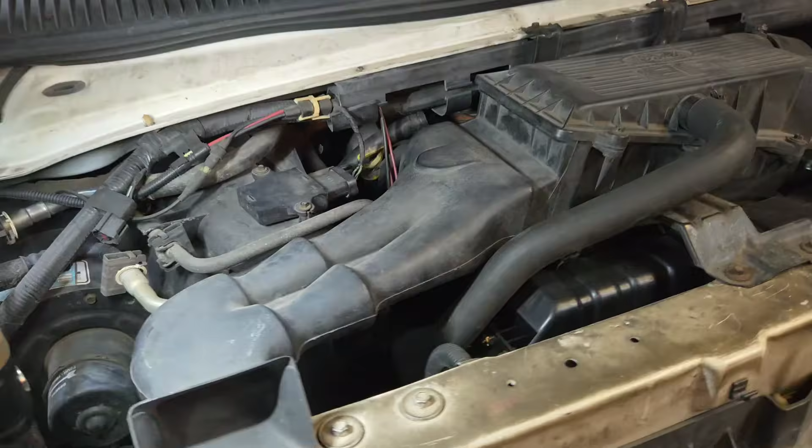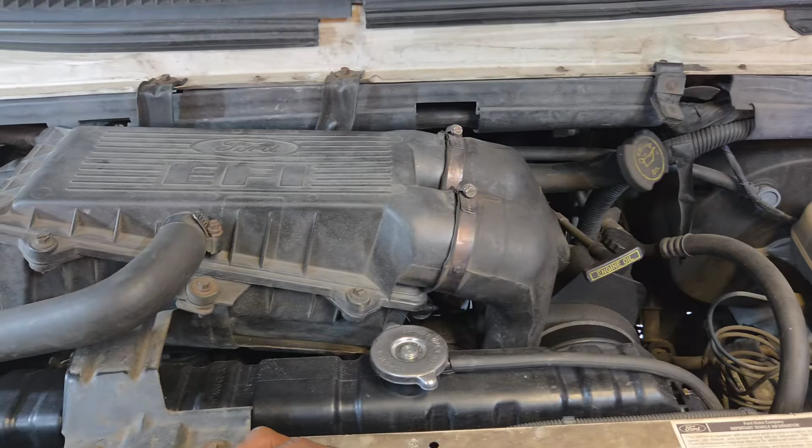Got a 19, I'm about to say 2000. So accustomed to saying 2000. 1999 Ford Econoline. It's a 4.9 engine, inline six, and just popped up. He called this morning. It's a commercial vehicle, and it was idling poorly, not running well.

I'm gonna let you hear it and let you know my thoughts, because what it is, you start it up, it just don't want to stay running, stay idle, and you have to hold the throttle to keep it running. But when you drive it, it drives. It's just when it's stationary, it just don't want to idle.

And it sounds like it got a camshaft, like a performance cam, so it's loping. And when he was talking over the phone about that, I'm like, map sensor. So if you dealt with a lot of older vehicles, if you disconnect the map sensor, it runs rich, because this is a very integral component on a lot of these engines, the older engines and even modern engines, because it needs to know the manifold absolute pressure (MAP) to determine the appropriate amount of fuel to deliver.

So you may have a mass airflow sensor pre-throttle body that can also still calculate how much fuel delivery is required. But in this particular case, it's a map sensor, and it takes the vacuum from the plenum in the intake post throttle plate. And with that information, it is very integral.

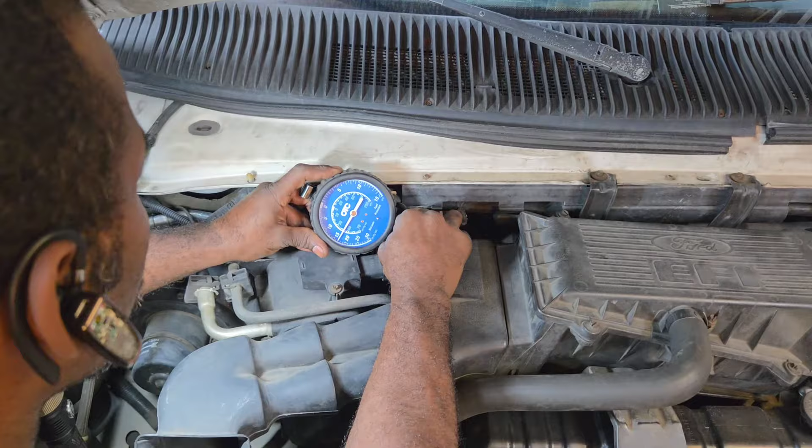So it'll clear up and start to idle fine. Let me check the vacuum. So with these map sensors, you want to make sure you have adequate vacuum. Around 15 inches is normal. Between 15 and 20, that's really good. 20 is really good. But so we're around 16 right now.

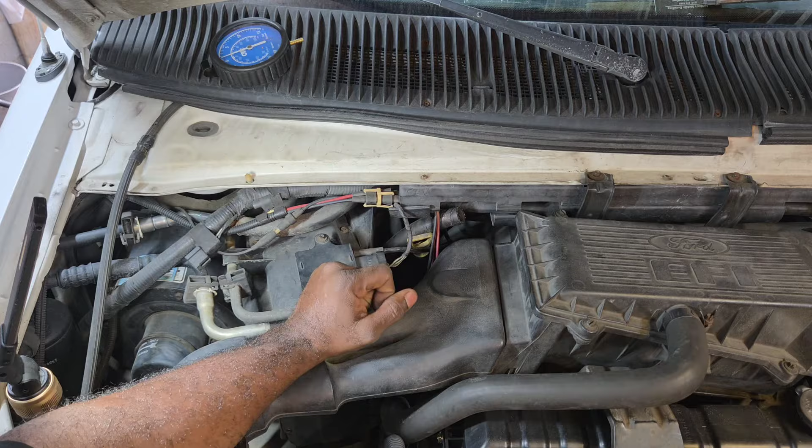Plug it back in. And then it wants to stall. Let's check the powers and grounds, because we need powers and grounds and signal. Being this is the old style, it measures hertz. It doesn't go off of a dynamic voltage system, but more of a pulse system, a frequency. So, and I ain't the smartest, but I do have a device to tell me the value that it is producing, which is the Power Probe 4.

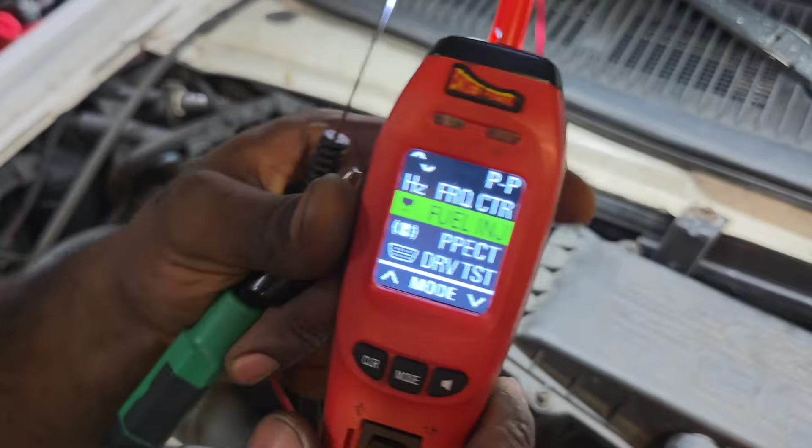So let's get this disconnected. We'll check our powers, grounds, and our signal. Usually the signal wire is going to be in the middle. And let's see where we're at. We got the Power Probe 4. It has various test capabilities on here. Multiple different tests.

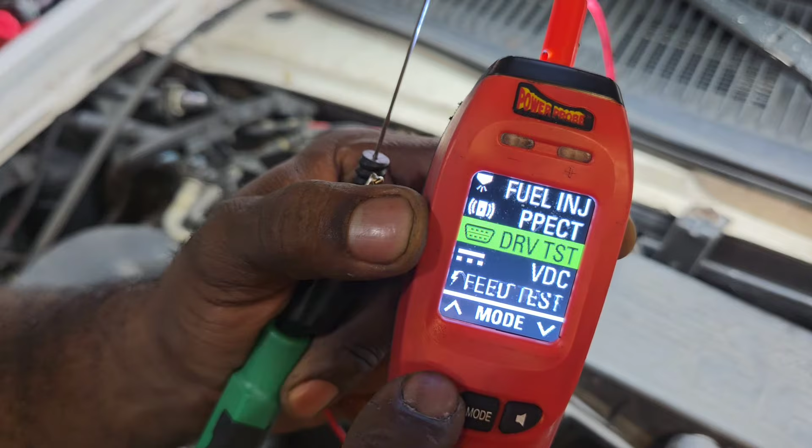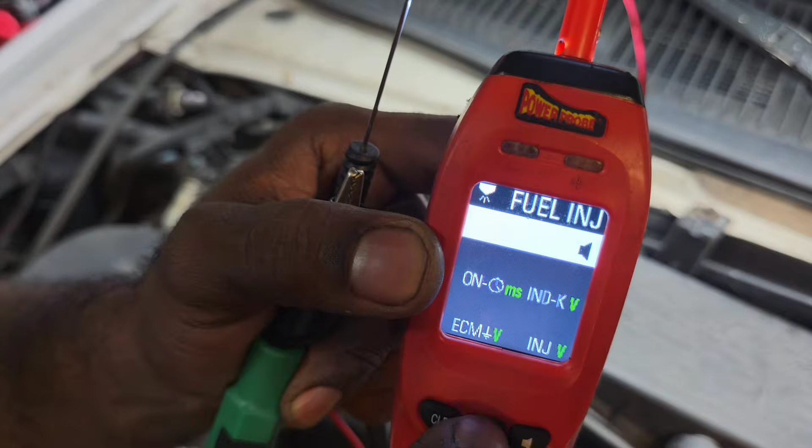We can measure alternating current. There's other pinpoint type tests, voltage feed tests. We can do driver tests, and mostly it measures powers and ground. But the cool thing is it can measure injector on time too, in milliseconds. So we can measure that if we need to. But mainly we just need to test for powers and grounds and hertz.

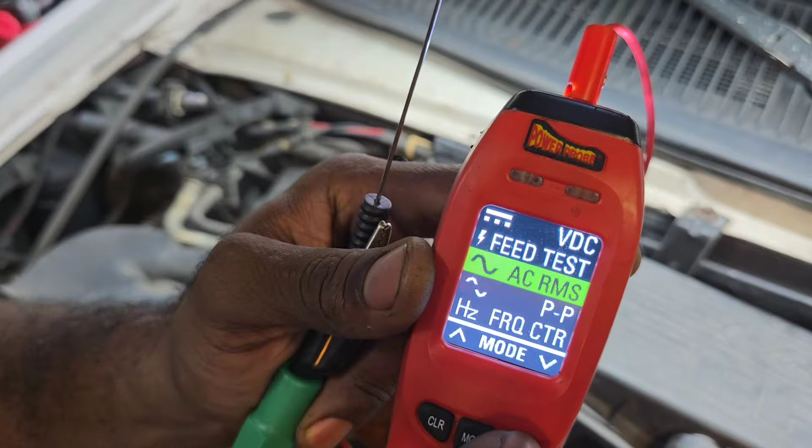So let's go to power feed test, VDC, voltage. Where is it? There we go, right there. So we're gonna go here, and we're gonna test for powers and grounds. Test my connection first. Make sure everything works. Let's get this pulled out. I do have the key in the on position. So key on, engine off.

That's what this test is going to consist of, and then we'll pull up a little bit of information and see what the standard is. But mainly we just need to tag on to the signal wire. So we need to know where our power and our ground is. So key is in the on position. Hopefully you can see this.

Voltage tip. Let me see if we can zoom in on that. If not, then I'll let you know what I'm seeing. I'll try to narrate. So we got 3 wires. Typically, one's gonna be voltage, ground, and signal's typically gonna be in the middle. Key is in the on position. And right here we got 5 volts.

On the other end we have ground. So here's our ground on the far left, this is like a white with a red stripe. Then we have a brown and white stripe, which is going to be our 5 volts. So the signal is going to logically be in the center, and there's our signal right there in the center.

How I know it's going to be a signal is typically because of the voltage being lower. It's lower than the supply voltage because it's going through like a driver and various resistors or some stuff like that. However it decides to interpret the information, it's going through other components inside the computer. If I'm in doubt of which one is the voltage supply, I can use a test light and watch it dimly be lit. Let me show you.

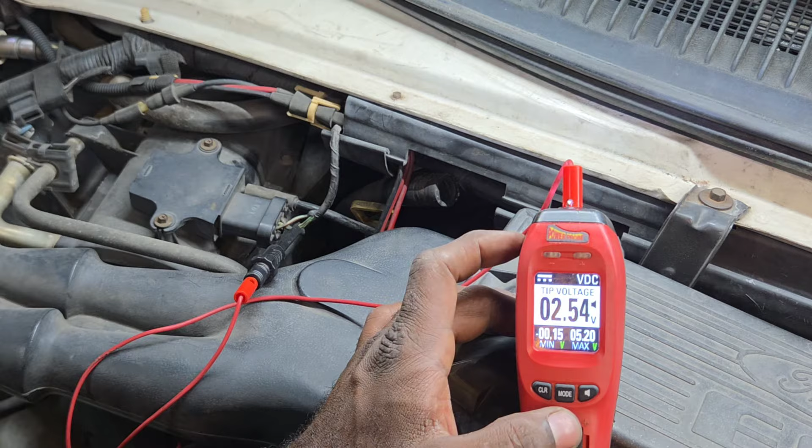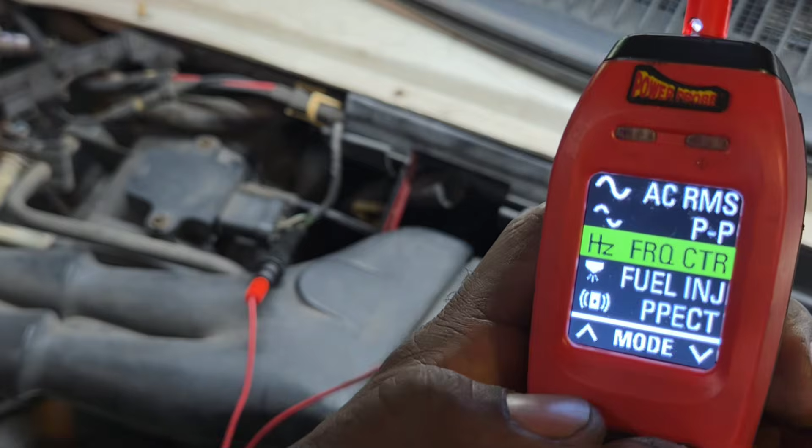Let's go to the portion to read the frequency. There we go. Okay. Current state with everything off is 135 hertz. Let's pull some factory data.

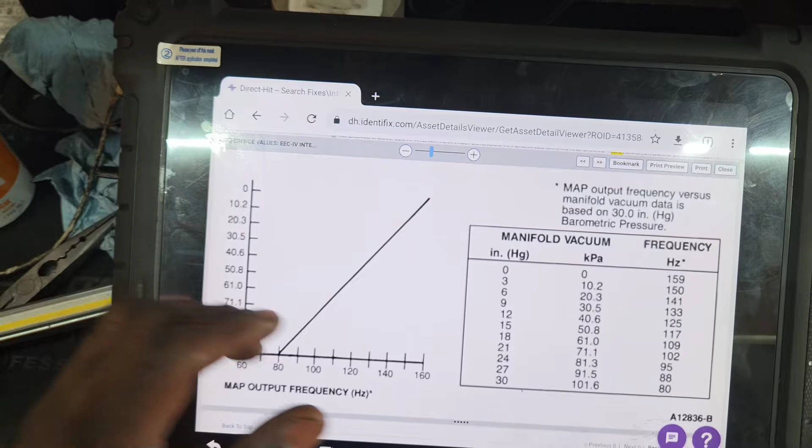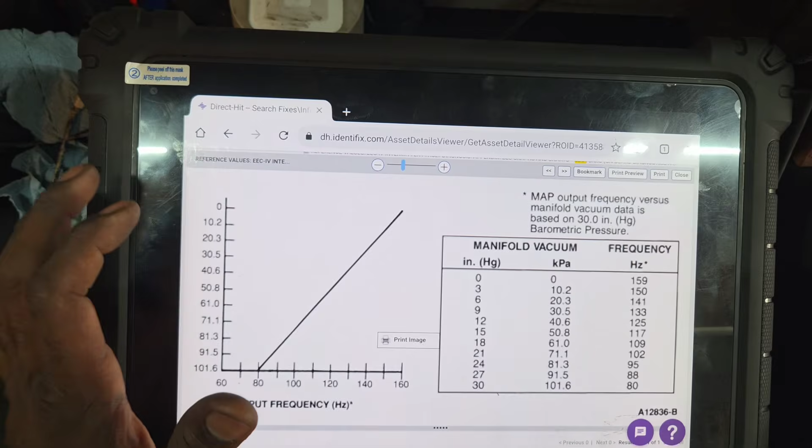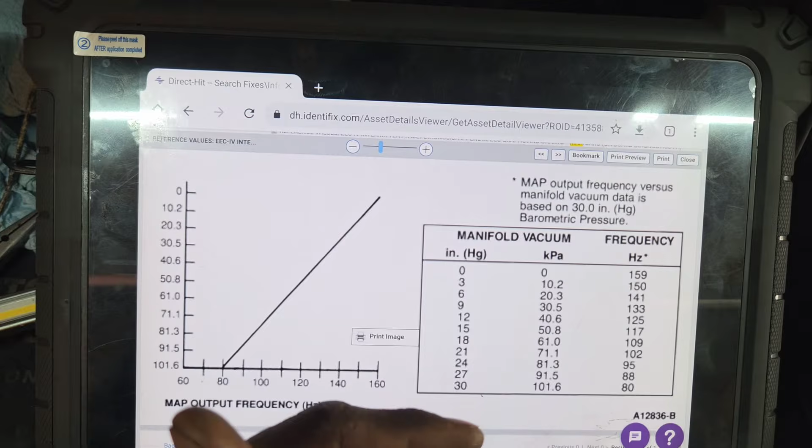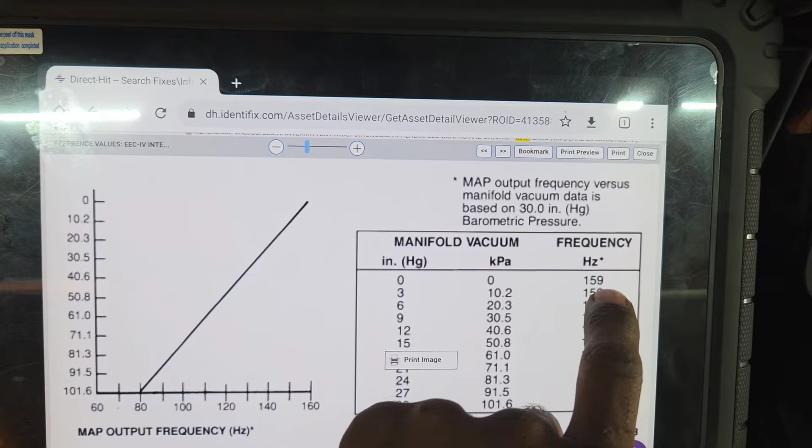So here, since we're on Identifix, we have service information, the standards of our component, where it needs to be. So the inches of mercury here, right here, 0. We need to be at 159 hertz. And let's see what the other one was reading. We're already off at 135 hertz. So we're already off there.

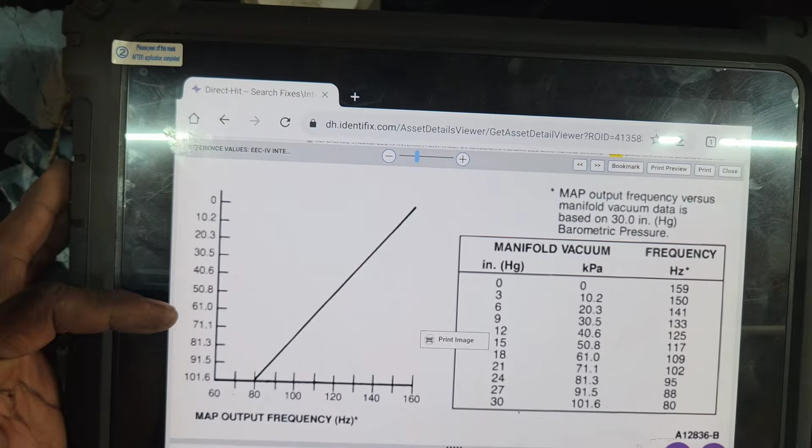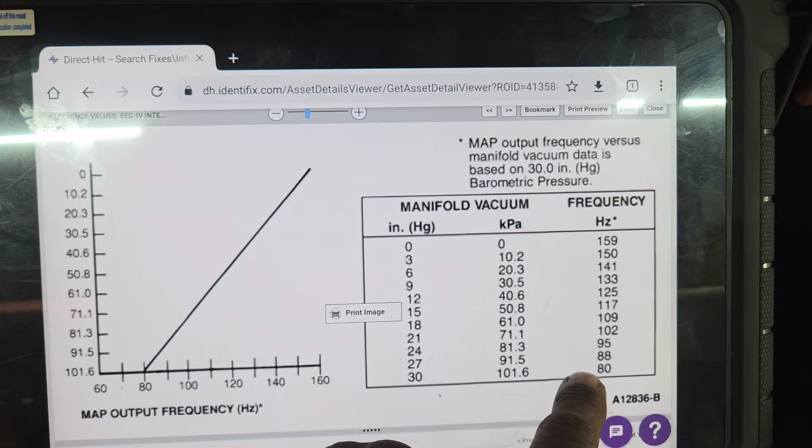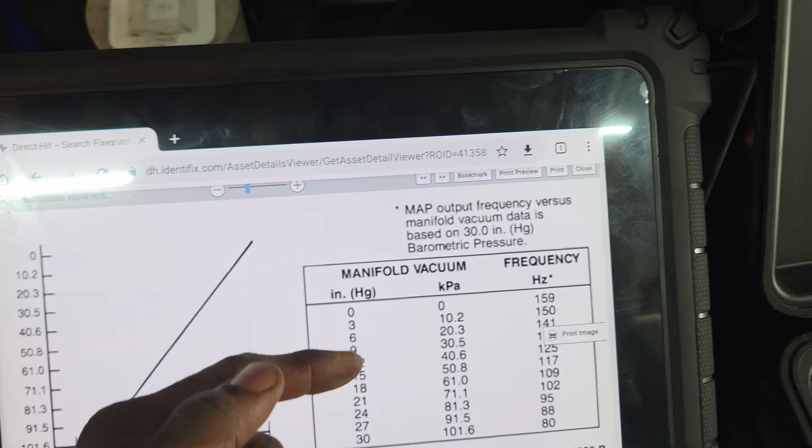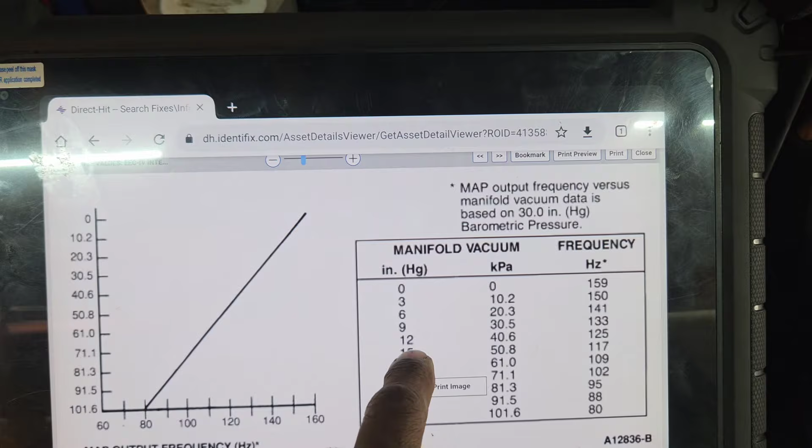So the deeper the vacuum, the lower our value. So this is the inverse of the voltage. I'm sorry, the inverse of our frequency here. So at 0, we need to be at 159. And the deeper we go into vacuum, which we were making around 16 inches of mercury, that should have been about 117.

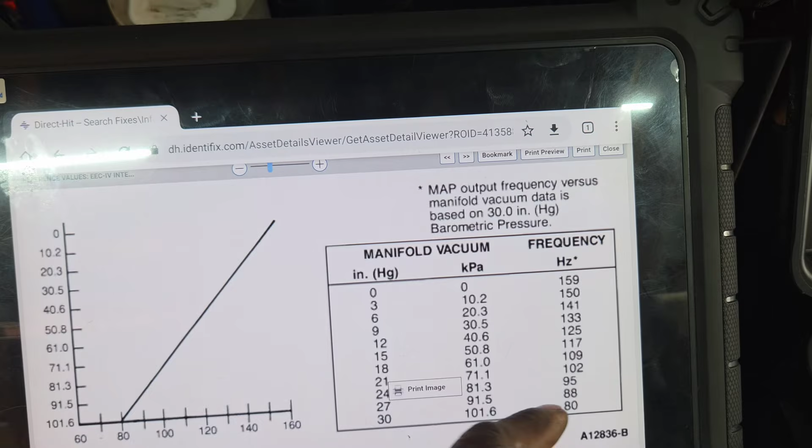So we crank this vehicle up, we need to be between 117 and 109, somewhere around about that. Let's just say 110, or 112 or so. I think that's a happy medium. So let's start up and see where we're at. All right, so again, we need to be at around about 112. I'm gonna take this vacuum line off so we can get it to idle. Then I'll plug it back in and see where it drops to.

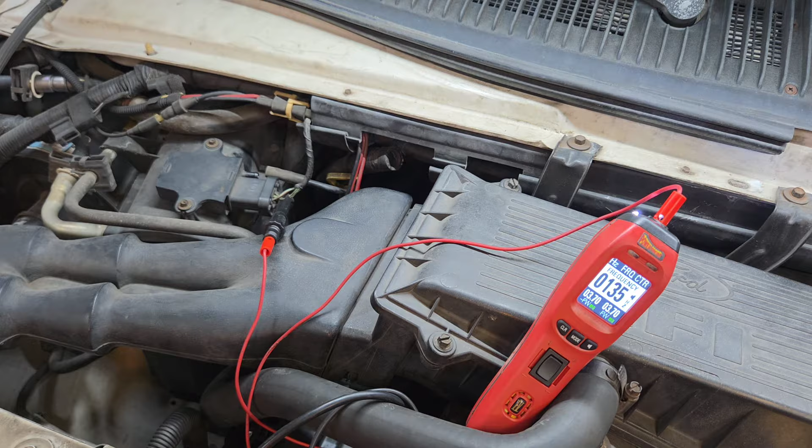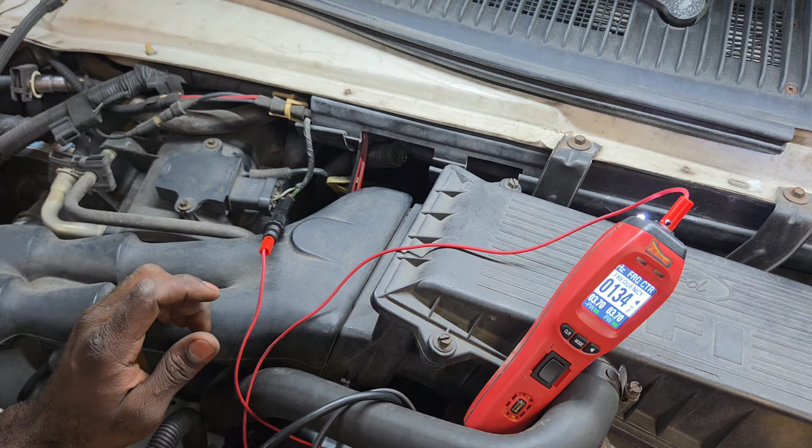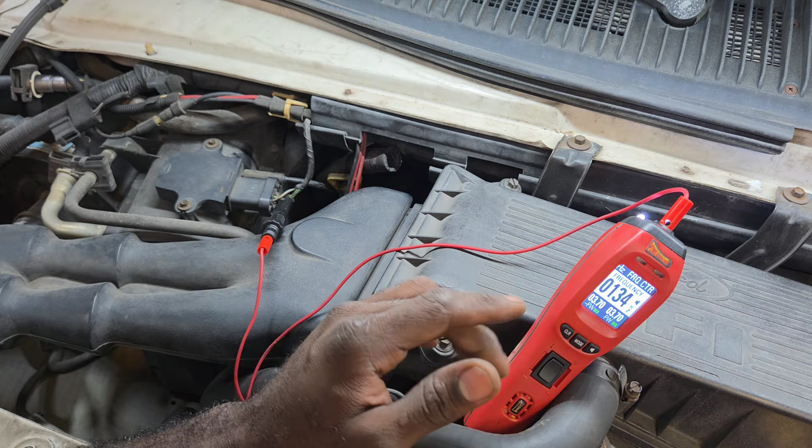I'm gonna plug it in now. Okay, we dropped down to 90. That's what we got down to. That don't seem right, because when I checked the vacuum, we dropped down to a maximum of 16, and 16 should have been around 112, not 90. Let me start it up.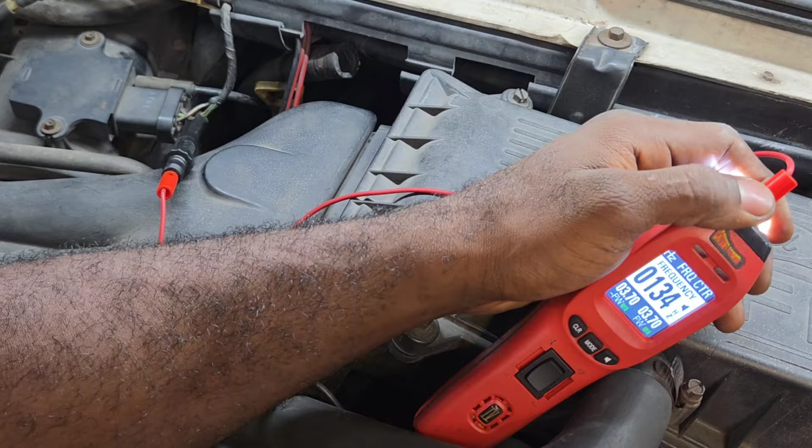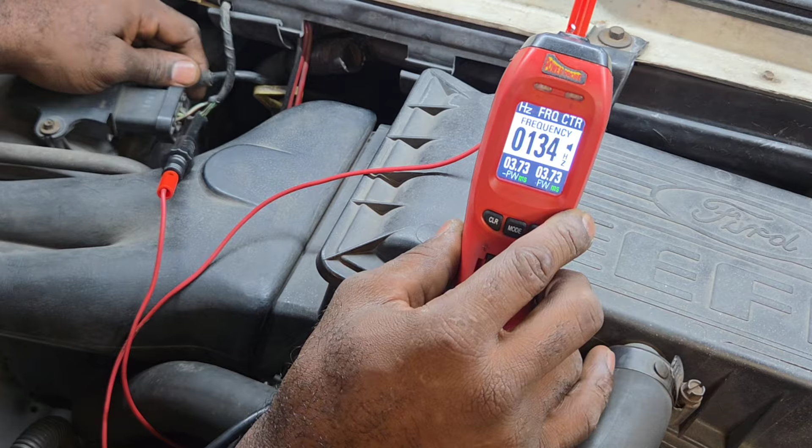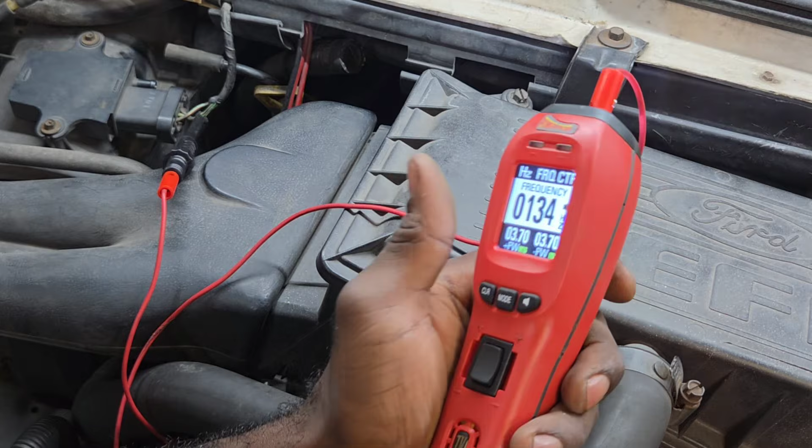Call me crazy, but there's no reason for it to go that deep. Let me try and see if I can keep it stable. Just dropping to 90. I feel justified in replacing this simply because the static state is off. And when we plug the vacuum source in, where we need to be is significantly off from that. So I think it's worth just going to the parts store, getting one and shooting a part at it. I think we might get lucky on this one.

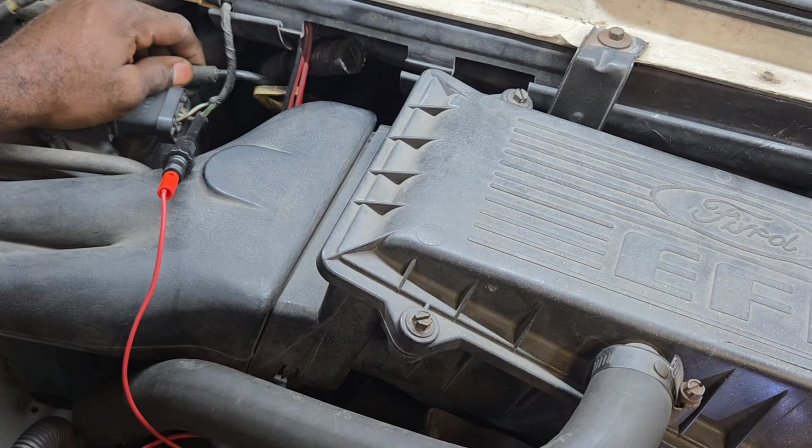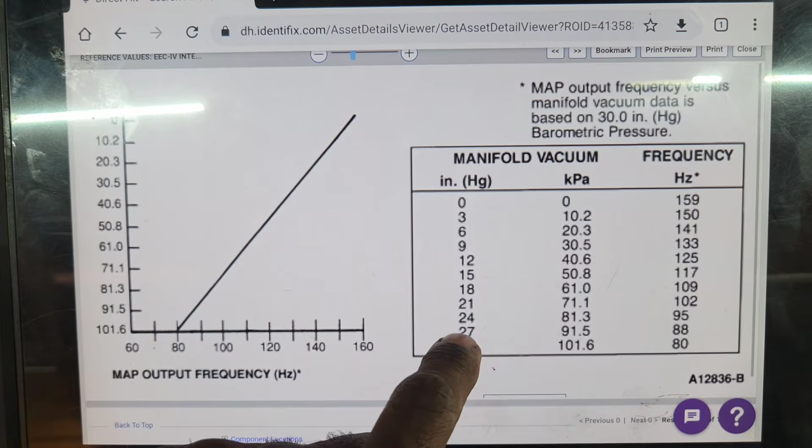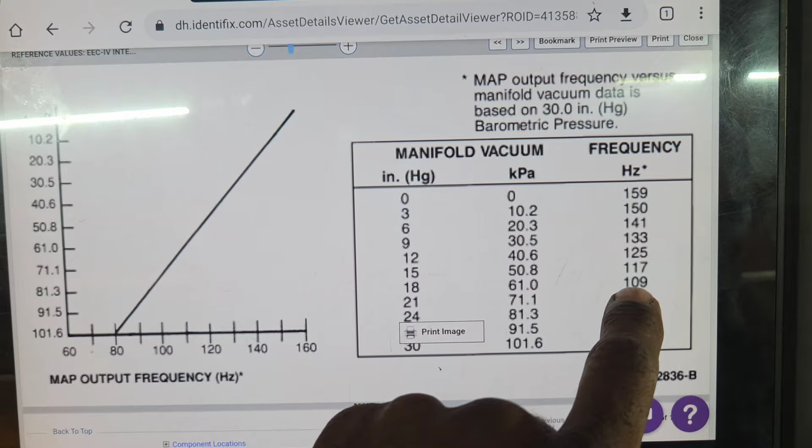So just to look at the graph again, 90 is crazy vacuum right there. The average car makes 15 to 20, and this is making somewhere around 25 inches of mercury. This is like unreal. So like I said, most cars are going to be around 15 to 20, so the most we should be dropping down to is 109, and we're not. We're going way below that. Let's go get a MAP sensor.

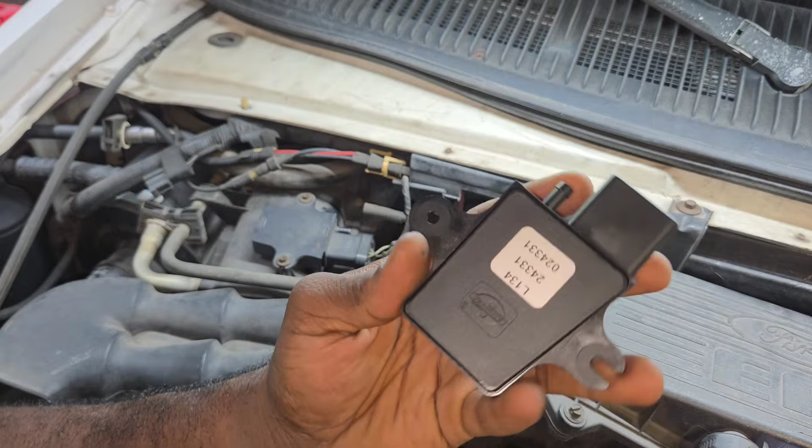Just got back from the parts store. Y'all know I frequently patronize O'Reilly's Auto Parts. Here's the part number, AS1. Standard Motor Products. This is what it looks like. It's actually got Standard stamped on it. It looks like a MAP sensor.

Sits right there. Now, what makes me a little nervous is we don't have a check engine light code. Maybe I just got conditioned into seeing check engine light codes and circuit faults, circuit mismatch, imbalance, out of spec, whatever, and we don't have that now. Okay, we can see that there's some unsatisfied conditions. Besides the data, I guess it's bittersweet that this is a rudimentary system, but I don't know. I'm nervous now. Let's get this off of there.

Get the comparative information when we plug it in. I mean, I'm doubting myself. Have what we had.

Oh, the key's not in the on position. Ha! Alright, where are we at? What have we fixed? This is not the right one. Now I have to be left in suspense again. Where's the voltage? It's different. Oh yeah, that's normal. I feel good now.

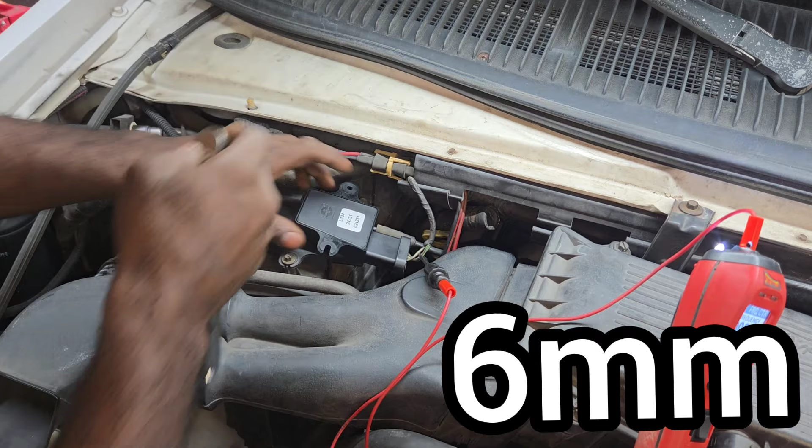Let me get these 2 bolts off. It looks like it's a 6mm or some very small head here. Let's get this off and replace it, and the new one popped in. Yeah, I got all worked up for nothing. But you know, at least you could see what the car was unsatisfied with. I mean, I'm overthinking it. Here's the old one, Ford OEM.

I mean, who rightfully wouldn't get nervous after just throwing the part on there that they know they need? I've been so confident in certain replacements and threw the part on there, and been just as wrong as I could ever be. That's that. I do want to put a little bit of dielectric grease on this nipple, so we wouldn't have any issues. It slid on extremely easy.

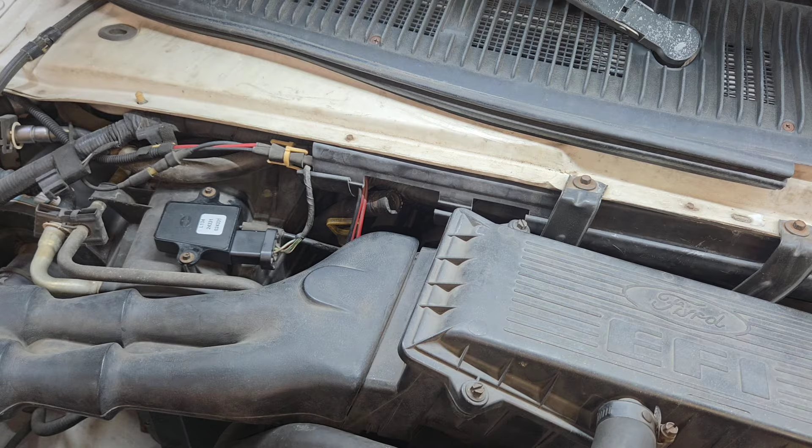Should we look at the data again? Got a phone call come in. All right, let's start up and see where we're at now. All right, we're still at our value, and it runs extremely smooth too. Before it was trying to stall. Now it runs amazing. Just snap the throttle. Well, this repair worked out pretty well.

Now, when I get these vehicles and they have specific symptoms, it could have been an oxygen sensor on this particular car. It could have been high pressure. It could have been fuel injectors. But there was the big key thing that was pointing to this MAP sensor. Just like a common cold can have a blended symptom with some sort of underlying disease, this had similar symptoms with other potential causes, such as fuel injectors, high fuel pressure, that is.

I mean, coolant temp sensor, but this specific component, just from experience, will cause idle issues, but it will clear up when you give it gas due to the compensation and the influence of the MAP with the computer. The most it's going to produce is when you disconnect it, when you full throttle and it can accept that. It was running a little rich, or probably in this case, because it was dropped so low, it was running lean.

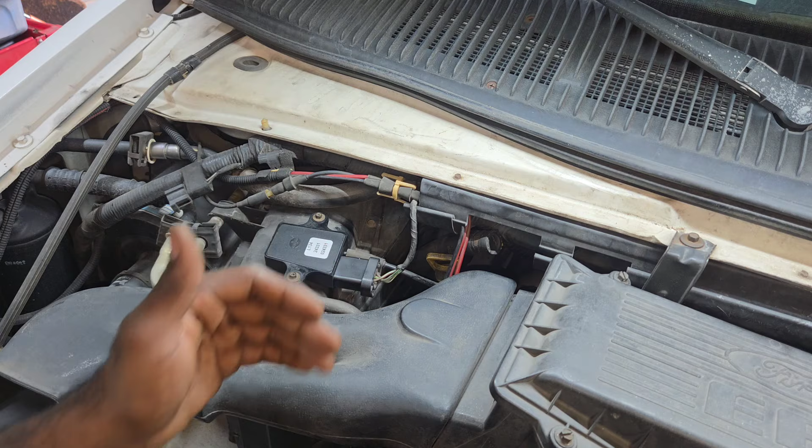But call me crazy, it felt like a rich condition to me. By the logic of the values we were looking at, it was running lean, but it seemed like it was running rich. It could have been because of how slow this tester is. It could have been jumping up. That's when it was stalling. So when it jumped up to atmospheric pressure, then it would stall.

But by the logic, when I disconnected the vacuum line, it compensated and allowed it to run because it idled the vehicle up. So I believe it was trying to make that trajectory up to atmospheric pressure and run rich, demanding more fuel. But because I didn't keep this blocked off, the vehicle was able to idle as it should and make the compensation instead of stalling, and continue to run.

So I do believe, even though we saw lean values, when it started to jump up it was going to make an attempt to run rich. That's why it stalled. Like I say, it could have been oxygen sensors, but they have very specific symptoms. In this case, loping while idle, it accepted the throttle and cleared up, and it ran better when you disconnected it. That's the good thing about the old cars. They were so old and rudimentary that they had the ability of working around more so than these new vehicles, and not going into a limp home mode.

So it's fixed. It's running fine. I'm going to call the guy and let him know he can come pay and pick it up. I was right the first time under my speculation because of experience. But hey, if anything happens, I'll definitely update.